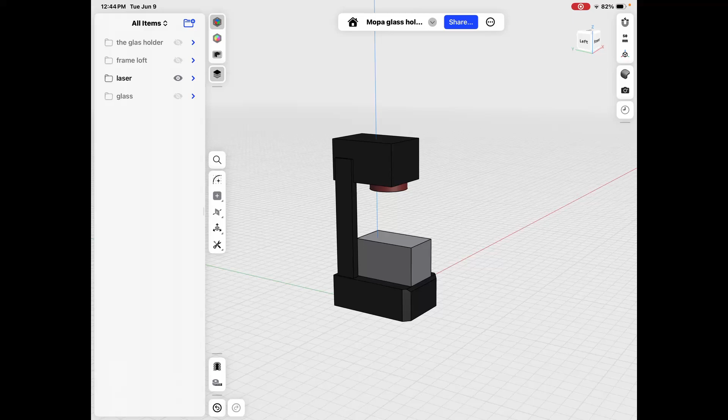I made a video before when I was drawing this. I recorded everything, found out I screwed up the sound, and then tried to do an overlay on it. I learned a lot about DaVinci Resolve, and after spending 3 hours on it, I figured it'd be easier to just shoot the whole video over and do it properly this time.

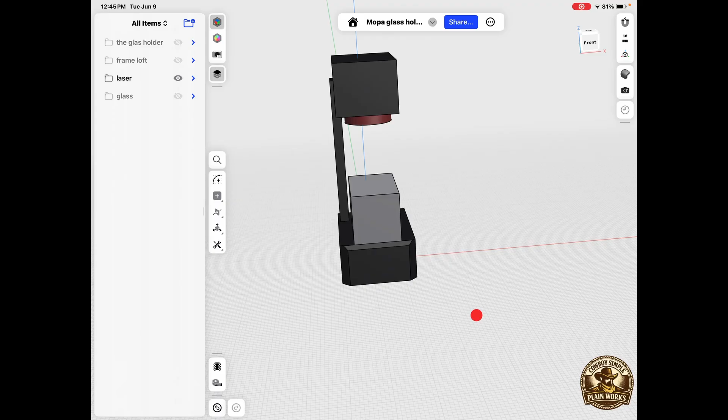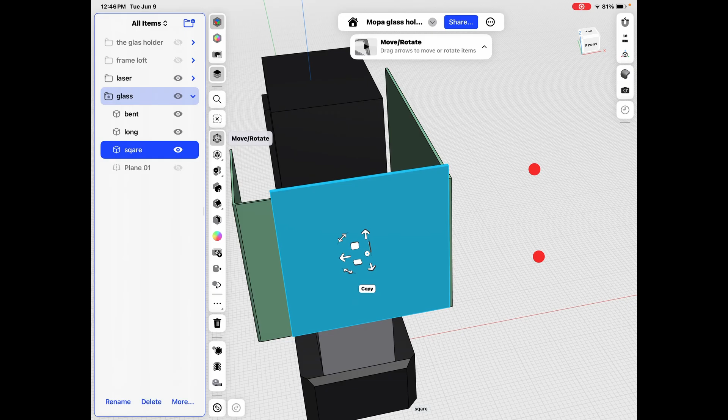This is the laser, and this is the glass. There are 3 different pieces of glass. This one with the bend came from Commarker, so I know it's certified. This one also came from Commarker—it was part of the housing kit, and the only thing I kept from that kit was the piece of glass. Then it took me a while to find one on Amazon that had the actual certification stamped on it, so this is another one. The idea is, because I added this silver part, the XYZ table, to the laser, I need the things that hold the glass to be at that height so the glass actually protects me from the laser beam to the XYZ table.

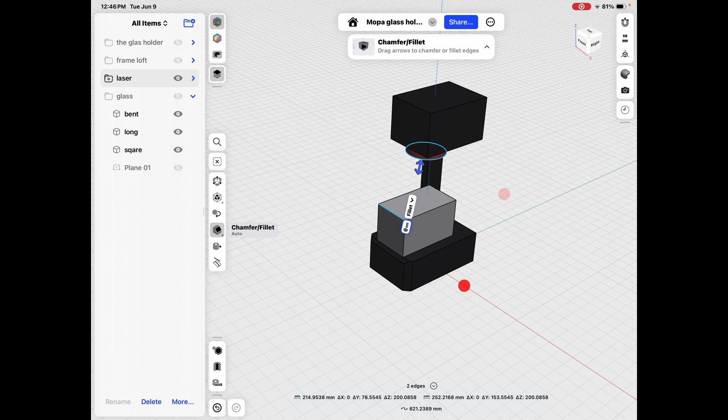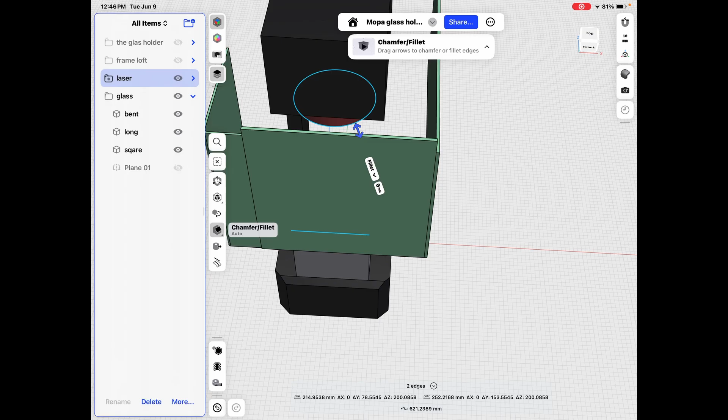To do a quick explanation, this is in no way what the laser actually looks like. What it does is, as I'm drawing things in rendering size, sometimes I get too zoomed in or too zoomed out. This allows me to come back and say, okay, I know the glass was measured right. The laser may not be perfect, but this offset between the bed and the laser is the right measurement, which matters. And this dimension, left, right, front, back—so when it sets on the ground, I know how much space the stand needs.

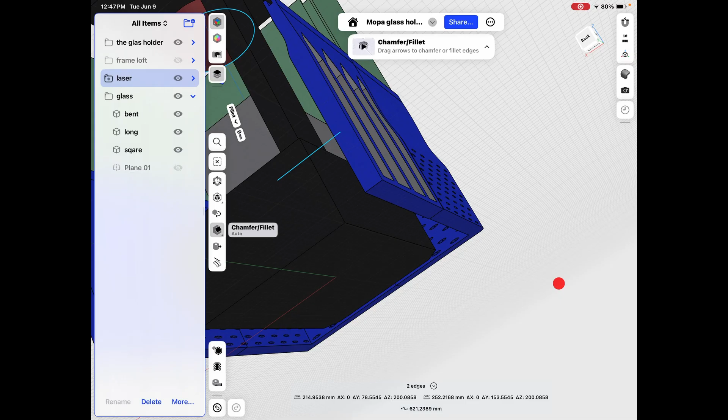So those are the things I own. What I'm going to build is the glass holder. This is the part that will be 3D printed. Because there are heat vents in the laser, in case this got pushed up to the side, I wanted to have holes in it to allow that heat to come out. This, you can't really get to the laser—this is to keep the cats out. And then this will have a giant piece of plastic around the outside that's completely opaque to protect the cats.

I don't need to spend a lot of money on a piece of laser glass because at this angle, nobody's going to be looking at it. So what we're going to do today with Shapr3D is spend time on how to do this.

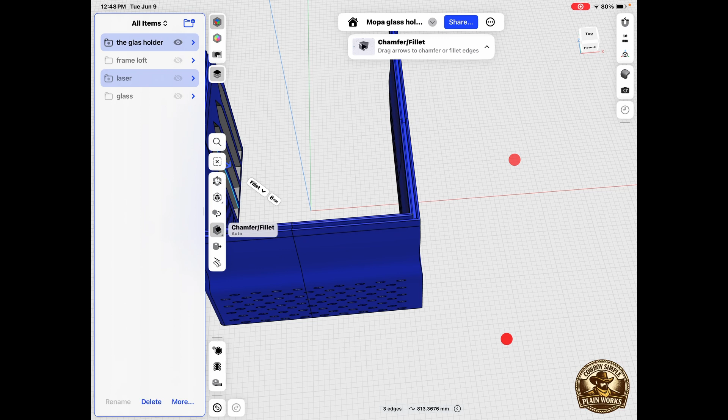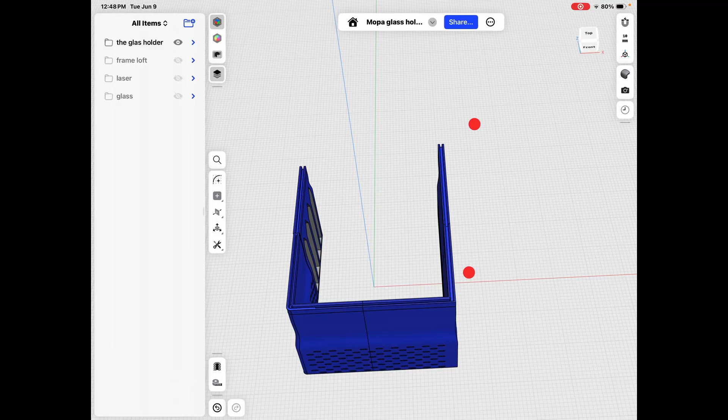Whenever you see the red dots, such as 2 red dots as I zoom in, and then 1 dot as I rotate, those are my fingers. This is being done on an iPad, so I can zoom in. Whenever you see the pen, you'll see the shadow of the pen, then when I touch something, you'll see the pen. That way you know what buttons to click as I'm doing all this, and you'll see the button clicks, which should make a better video.

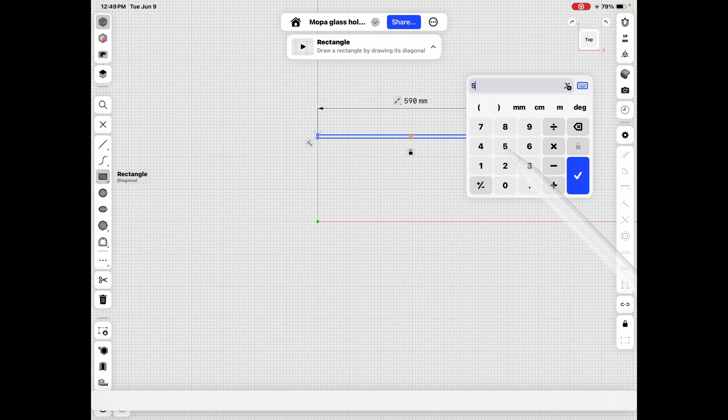Everything starts from a 2D sketch. So you come over here to sketch. I want a rectangle, and let's go ahead and make that first piece of glass. Let's say that I know the glass is 5 millimeters thick... it doesn't want to work... 200 millimeters wide, all right.

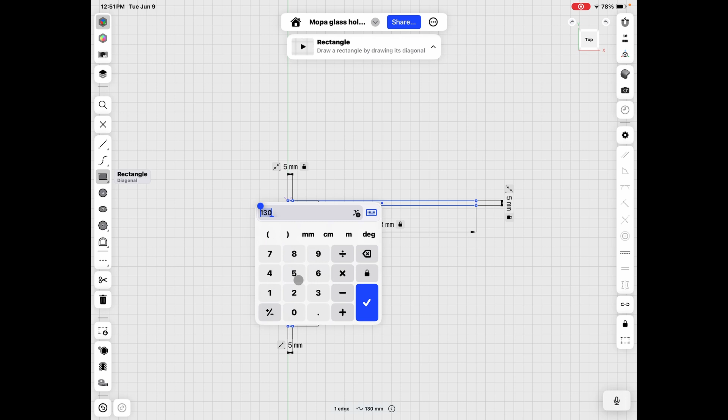We know that this glass has a bend in it because we're going to do the complex one. Now we're going to make the bend, which is another rectangle. We know it's going to come off that corner, so we can just make that our starting spot. We know it's also 5 millimeters, and let's say this length is 130. All right, that looks like the L. One of the problems with this object is these crossovers—that's what the scissor tools are for. So I can just clean that up, and now I have the dimensions of the glass.

But this is a glass holder, so what I want to do is select the model.

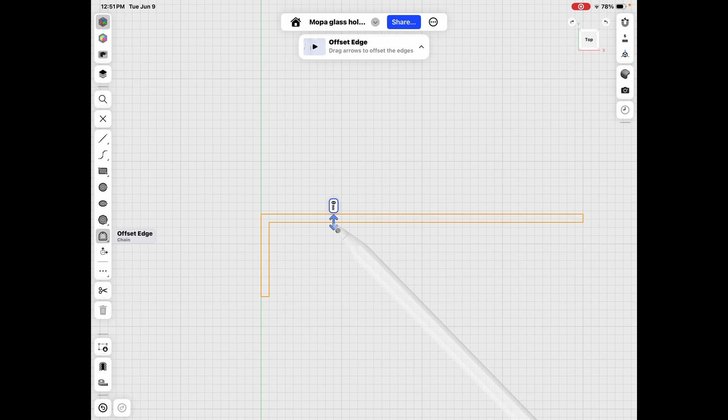I want to do offset edge. This would be the face offset of the material holding the glass. I want to come out on each side about 5 millimeters so that it has enough material to hold the glass in place. We've got our 2D rough area graphic.

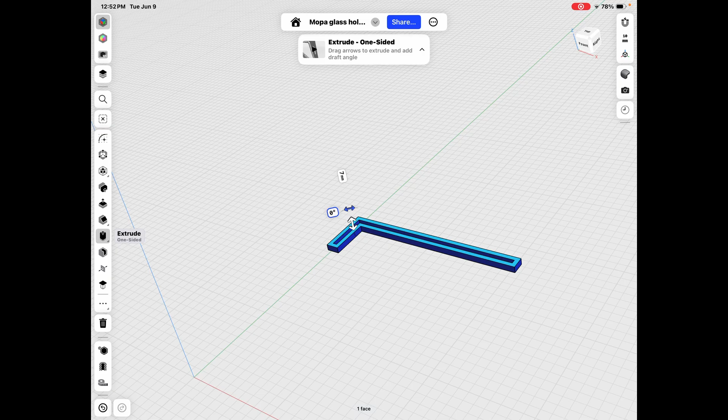What we want to do now, we want 7-ish millimeters to hold the piece of glass. And then from underneath here, we want it to be solid. So that's the piece that holds the glass.

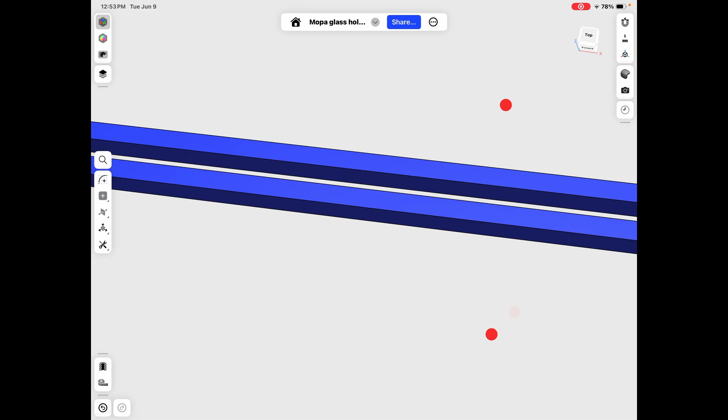Let's do a copy of this, and then let's fill this area in. We could redraw it and extrude it, or we can just slide the edges over each other to fill in that gap. This can be done with the face offset or the extrude.

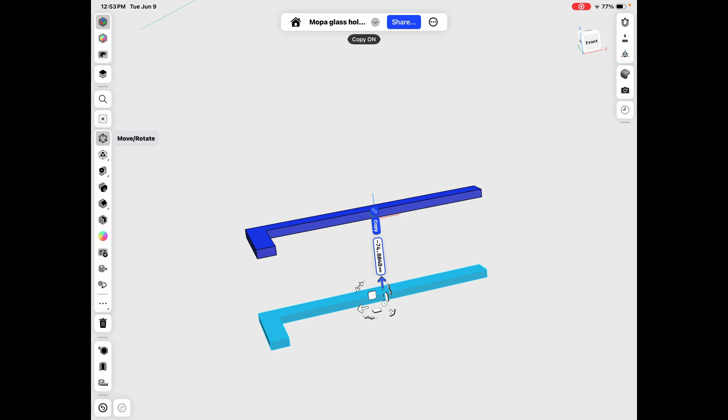All right, so now we have a stopper, if you want to think of it like that. And let's make another copy of that. Okay, let's take this copy, and I want it exactly, precisely underneath this one.

I could try to move it and mess with it in 3D space. That is exceedingly difficult. So never do that. Always use the translate button.

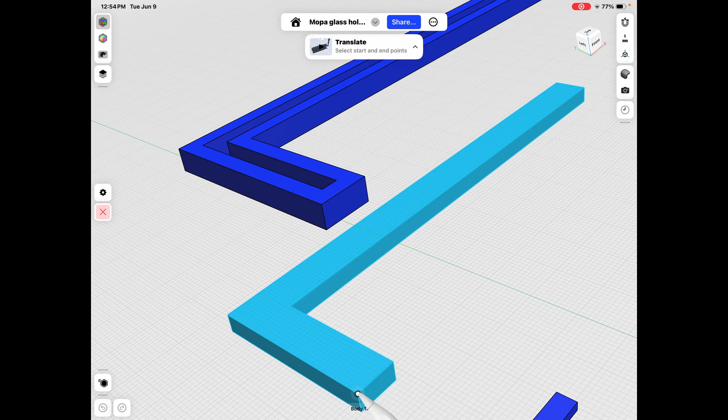Find a point from where you want to go, to where you want to go. Select that. So the top corner goes to the top corner, and bam. That's actually not what I wanted to do, but you get the point.

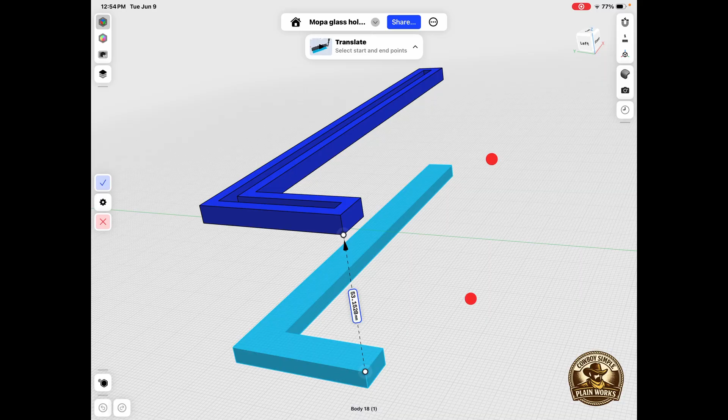I want to take this, I want to translate this corner to that corner. Sometimes it helps to zoom around, make sure you've got the right corner. There. Now the piece of glass will fit into that 5mm hole and be stopped by this one.

If you have an old printer or you're using goopy material and you need to change the offset, like 0.15 millimeters, you could also do that right here. You could also say, hey, I know it's going to squish out. I need to squish this in a little bit.

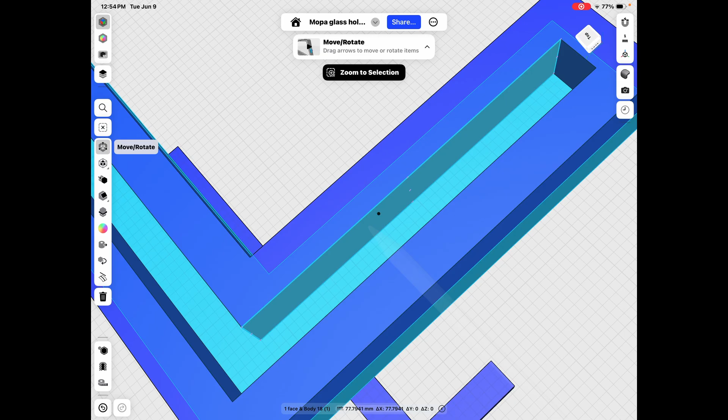I'm not going to do that right now, but I do want these two pieces to become one piece. So we'll select both of them, and then we'll come over here and do a union. That's a binary tool. Now it's not two separate objects that are lined up. They're combined.

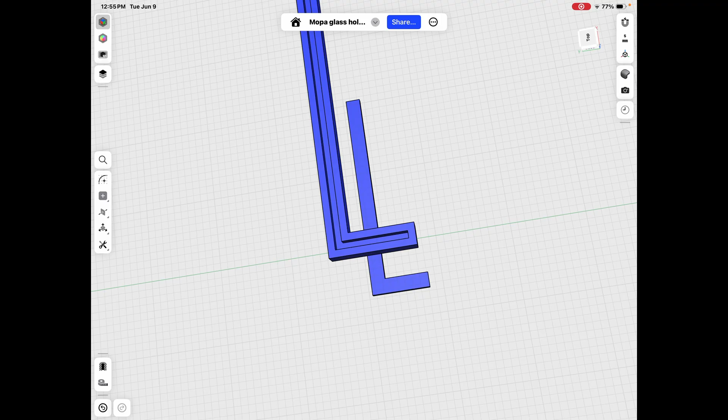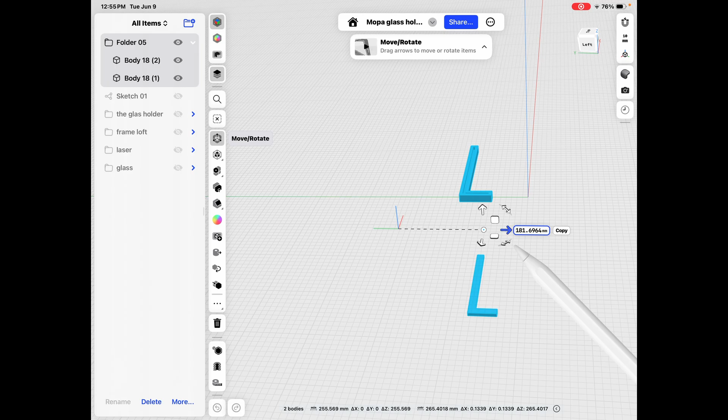If you want to treat them as something that is not combined, but when you move one, you move the other, you can take them and make them a folder. So now I could grab the folder and move the items at the same time. When I'm doing binary objects like union, subtract, modify, that makes two objects into one. When I put them into a folder, that just groups them so I can move them around. If you're used to vector drawing programs and grouping and combining, it's done at the folder level.

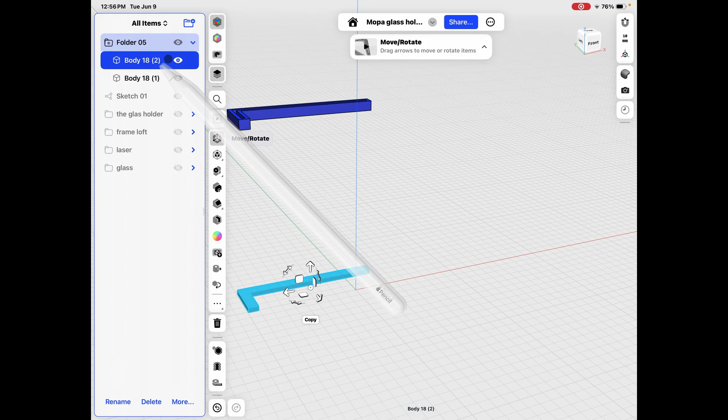All right, now I want to make this sort of have a design. And I really, so it won't fall over, I really want the base to be bigger. So let's go back to copy. Oh, come on. Select, copy. It's going to be narrow to about there maybe.

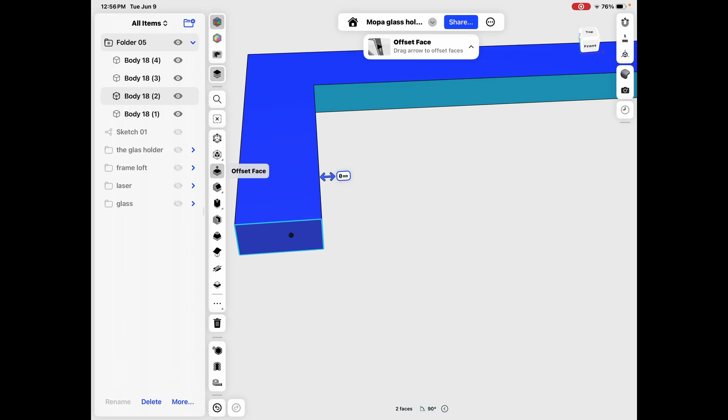I'll make another one just in case I change my mind. And then this one, we want it to be fat. So let's just select the edges, or the outside faces, not the edge. And let's extrude those by 5mm and see what happens.

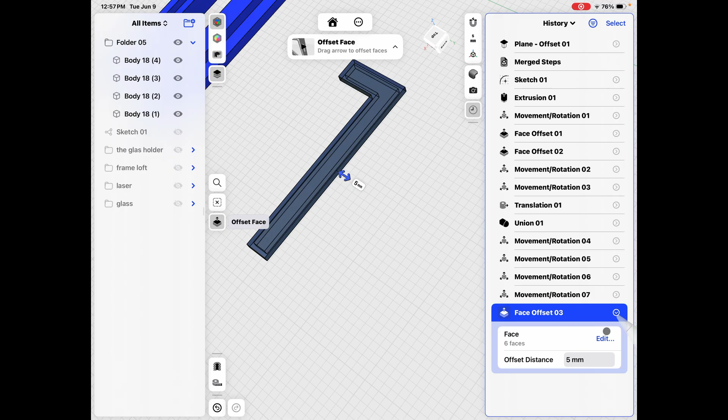Is that enough? Do we want to do some more? This is parametric, so anything I do is logged. So if I did a face offset and I don't like the number, I can go back and make it 10. Is that too big? Maybe 7. And you can do this through the whole history.

7 is too big. And you can go through and do this through the entire thing. I can change any of these at any time. I can pause it. So if you make a mistake, you can travel back in time with this program and modify it, which is crazy handy. Okay, I like that.

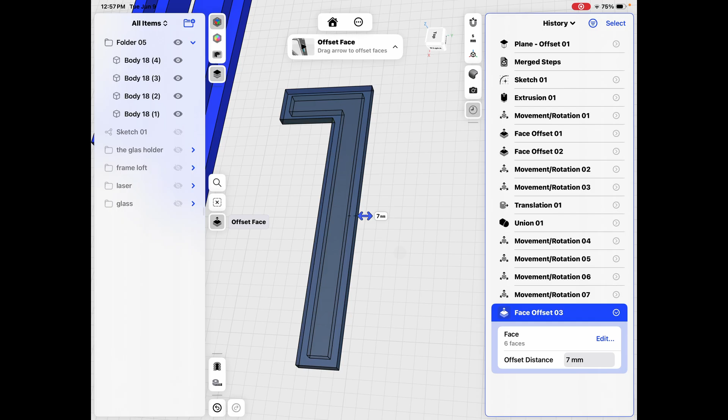Move history out of the way. I've got this bigger, fatter object at the bottom. Let's copy a few of them up, which is going to give it a path to follow. So I want it to be one solid object.

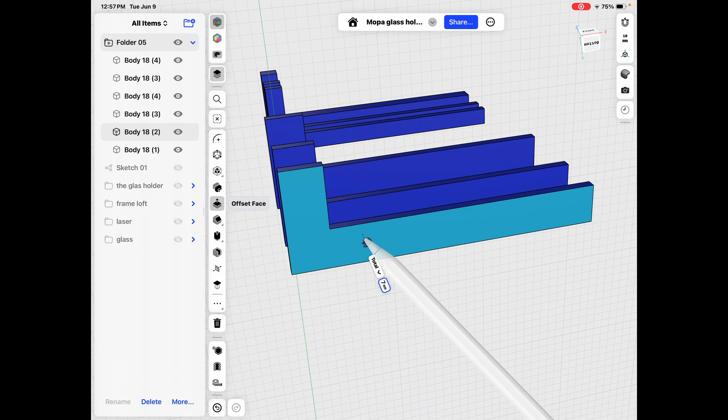I've got these guidelines, and this is where the loft tool comes in. You select a face. In this instance, I want to start the bottom face. I come over, I choose loft, and then I just do the next face and the next face, and it will infill for me. Now it will figure out the math to make it go thinner and then straighten it up. And then I want that to come all the way to this solid piece right there.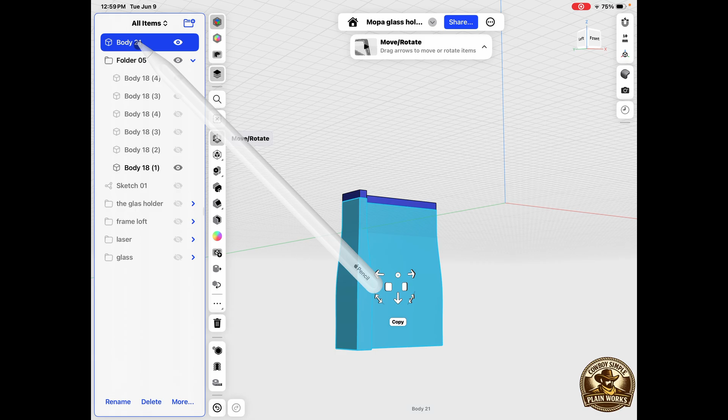This part and that part. So let's make it one thing and do a union. Now I have one piece.

We're going to grab that and rename it by holding down rename - glass holder V2. It's going to be printed in black. We can go ahead and select it, and go over here to visualization.

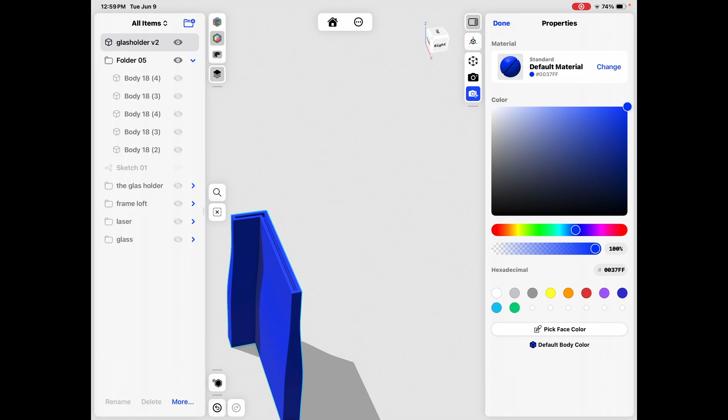Now we need to make the vents. For the vents, we're going to do something just quick and dirty, but it's going to show you a few tools. Let's do a sketch of a polygon.

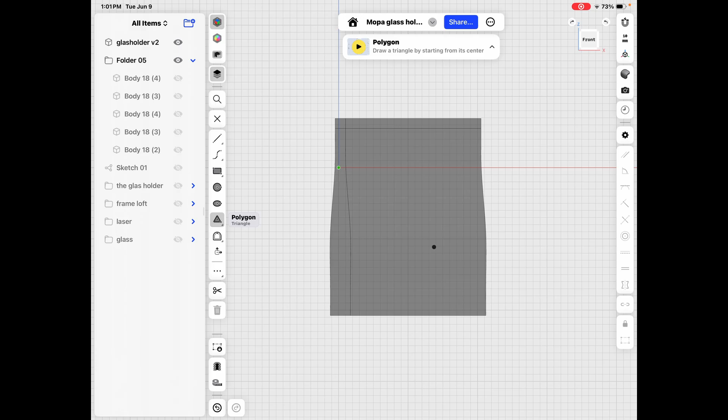You've got octagon, hexagon, pentagon, and triangle. If you click triangle, you can change the number of sides. So if you want whatever a 9-sided thing is, it'll make it.

Let's make it a 3D object first. All right, so this, extrude that out. Now we went from 2D to 3D.

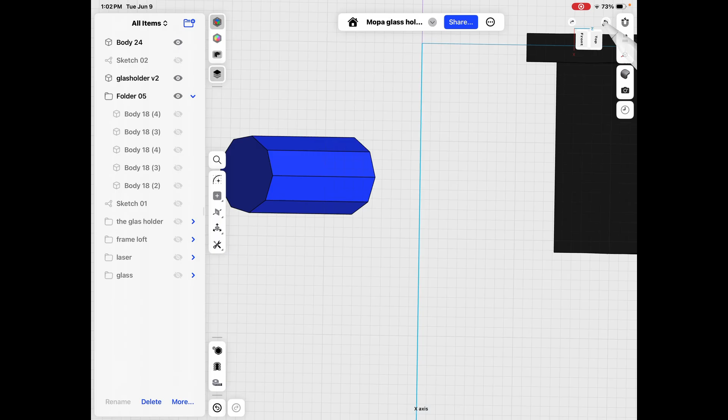Let's come back here and look at the front. You can use the little cube up here to move around, jump to quick sections, and then spin it around if you don't like it. So you'll see me always working on the front or the top or the back on 90% of everything.

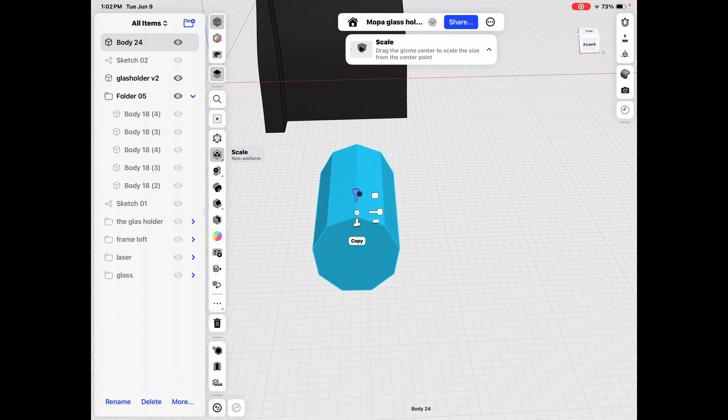All right, we select it. Let's select the object and go to scale. We have a couple of different scales. This is a uniform scale - if I move it down, it's going to move it uniformly, which is good a lot of times. This is the non-uniform scale - you grab an arm and it's going to scale only on that arm.

So I really want this to be squished down quite a bit, like a vent. Squish, squish, squish, squish, squish. All right, so we have the object we want.

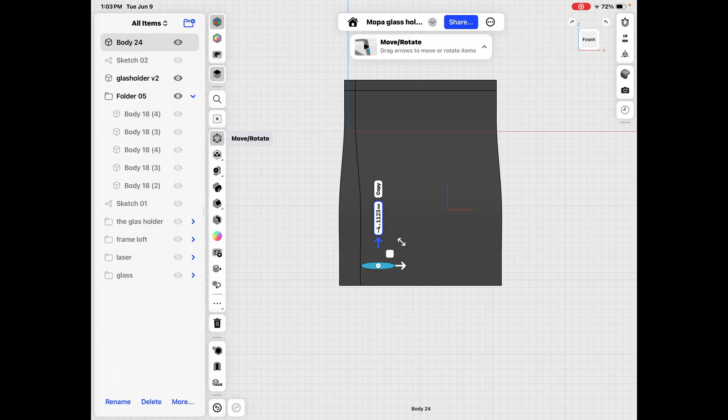Let's move it into a basic orientation - I want the vents to start right about where the laser's vents start and go up, but I don't need to go all the way up. And I don't want to draw this a whole bunch of times. This is when the pattern tool comes in.

You can do circles or linear. We're going to do linear. You can see how it's keeping the spaces even out. I actually don't want spacing - I want total distance because I want to constrain it to this area. So we're looking ahead on it.

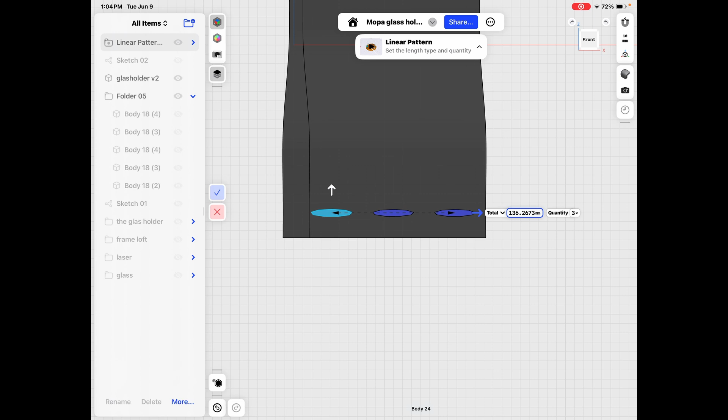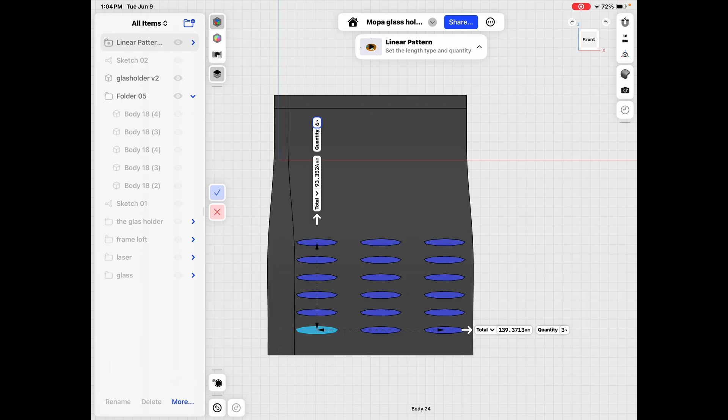All right, can I fit 4 in there? No, let's go back to 3. Let's take it up - this is about how high I need the venting on this fat part. Let's see, about 5... 6. 6 looks pretty good, and then we can even move this around.

The linear pattern automatically goes into a folder, so if you want to move them around, you click on the folder and get them exactly where you want them. We'll plunge it into the model where we want the vents. I can go over a little bit more this way.

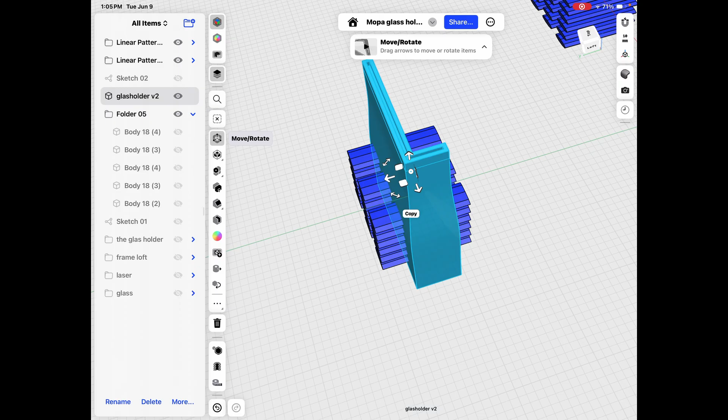We select the thing that we want to remove, or that we want to keep. I click subtract, then I click the folder so I don't have to click each item individually. We can see it gives me a preview and shows me the items it selected. This linear pattern folder is now empty because there's nothing in it - we just did a Boolean operation. We have an item that we can print.